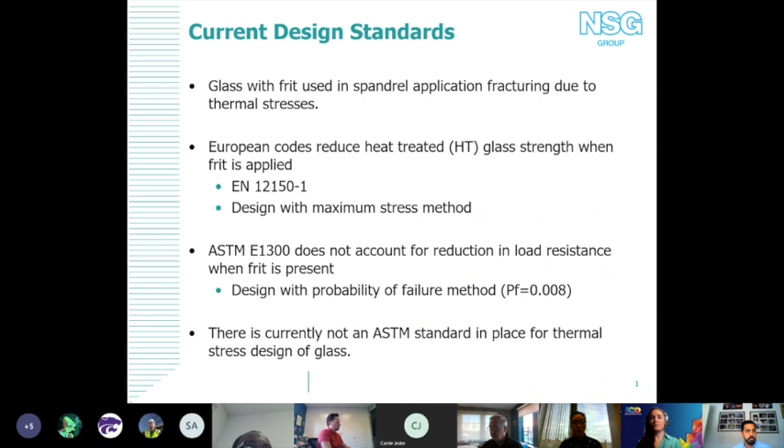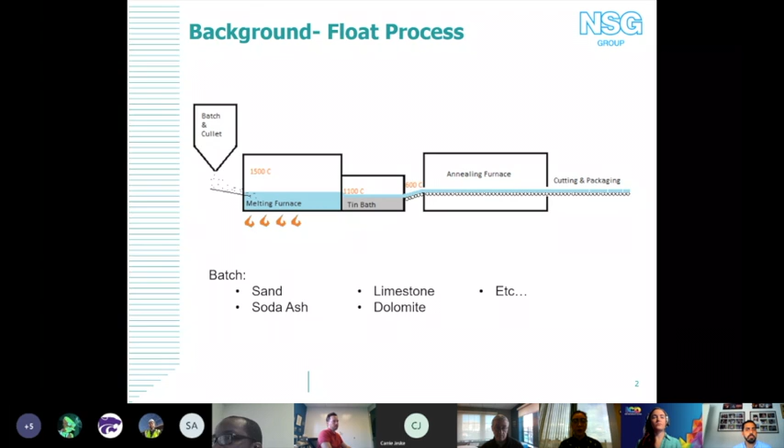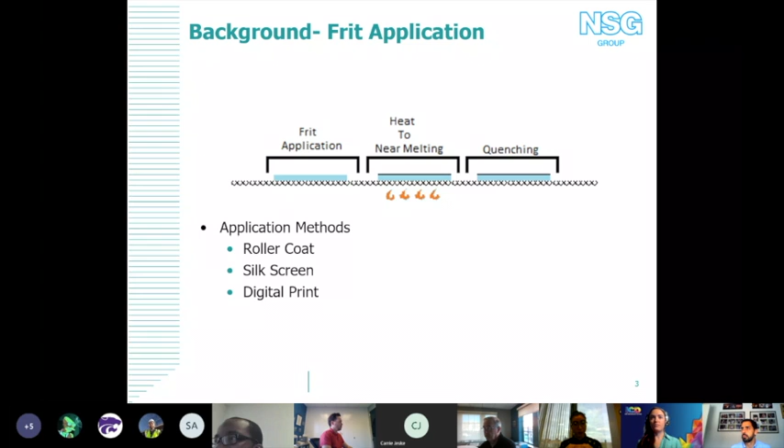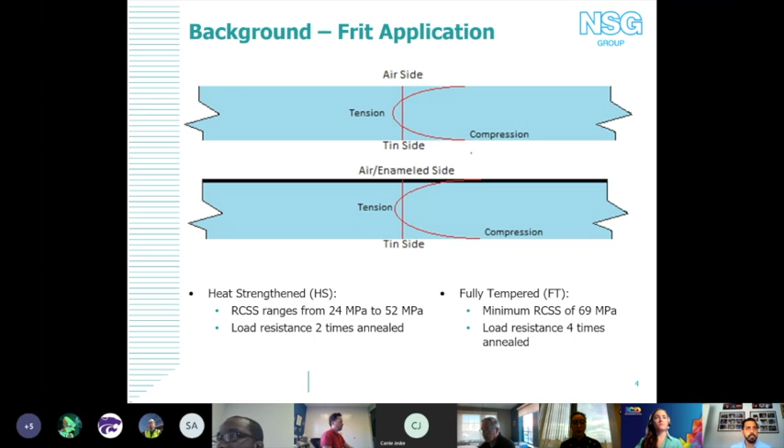So when you design heat strengthened glass, it theoretically has a load resistance of 2 times annealed glass, and fully tempered should have a load resistance of 4 times annealed glass. So this is just a general background on where we're starting. If you move forward, Kate.

So what I've done is I've broken out 2 phases of what my research was to give an idea of what this load resistance reduction looks like. Initially we did some small sample 4-point bend tests, and we use this just as an observation of: does ceramic frit impact load resistance? Does it matter which surface it's on? How much? Kind of just as a gauge of whether there's an actual change in mechanical failure whenever you apply ceramic frit.

Then the second test was our uniform pressure test, more what you would see in terms of a 4-side simply supported piece of glass. In this, we went through and checked varying percentage coverage, and we're able to see where the location of failure was with regard to the frit coverage on the glass. So we'll go over both of those.

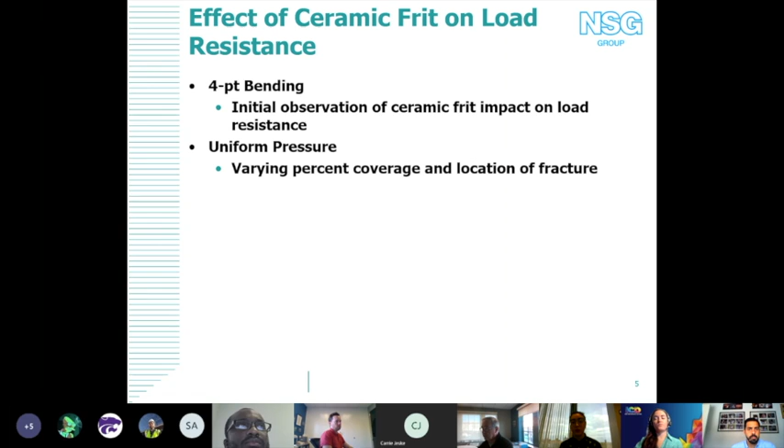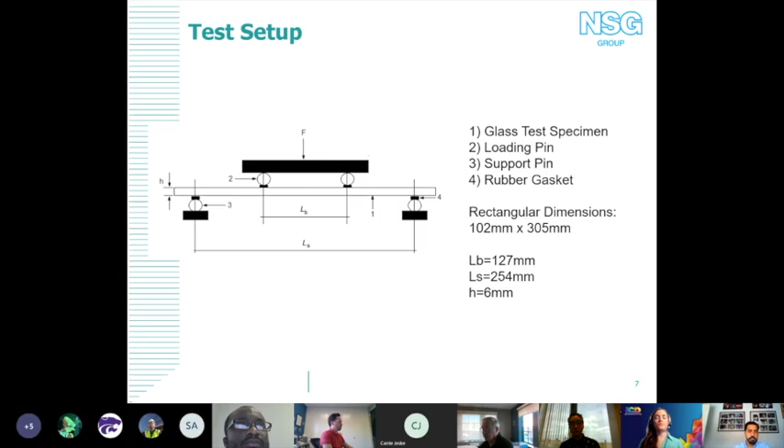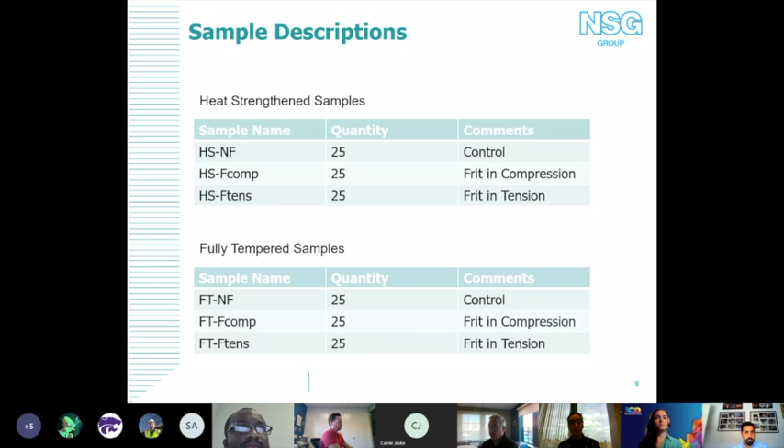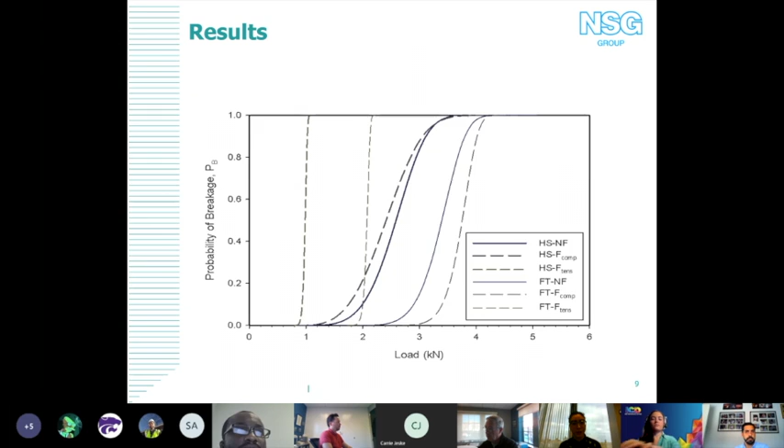So if we move forward, you'll see we focus down at a probability of failure of 8 in 1,000. It's a lot closer here, but we're still seeing a 40% decrease in heat strengthened glass and a 20% decrease in fully tempered glass once you start putting that fritted side in tension.

Some of the tests we did showed that the glass was fracturing at a stress lower than the recorded residual stress that we measured, which means potentially the residual compressive stress on the fritted side isn't as high as it would be on the unfritted side.

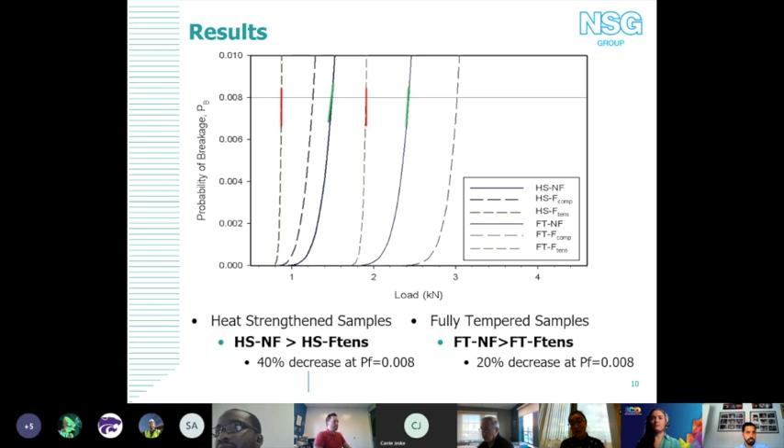This is just a quick layout of what those percent reductions look like. We can move forward.

When we realized the glass was fracturing at stresses lower than the measured residual compressive surface stress, we used a wet etch process to remove the frit and try to measure what those residual compressive surface stresses were, and we found them to be significantly lower than what is actually defined as heat strengthened or fully tempered by ASTM.

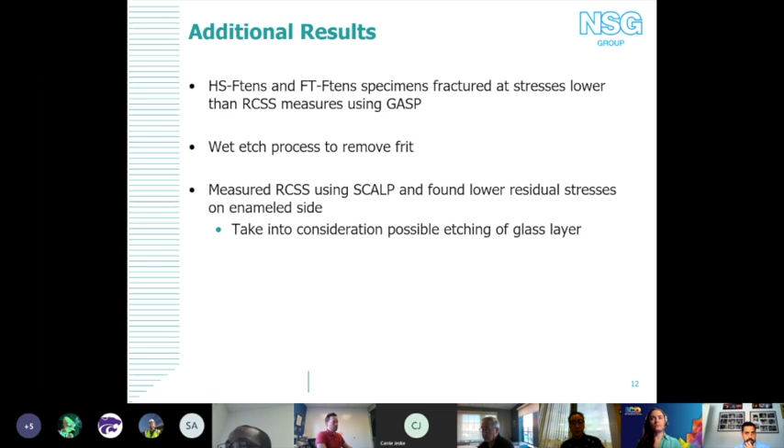So now I'm going to move forward to our uniform pressure test. These are four-side simply supported tests. Essentially we had these large scale tests, put them in a frame, and used a vacuum to create a uniform pressure on the surface of the glass. In this case, we were testing everything with the frit in tension, because we knew that was essentially where the issue was.

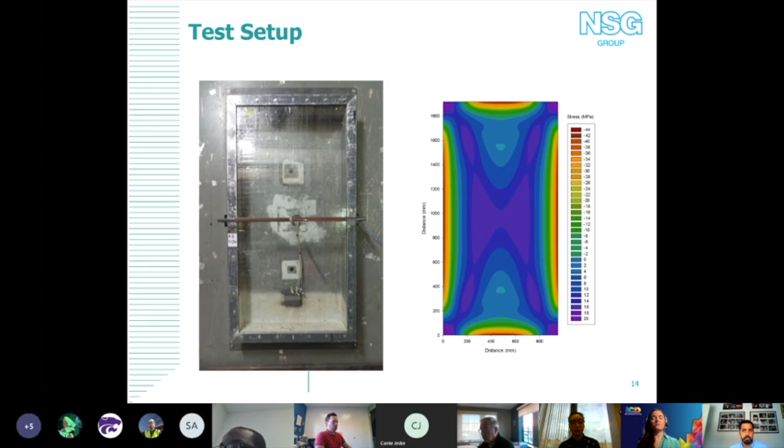What we did was test our control, and then we had varying percent coverages with this frit, and it was all a gray frit. So we did 40, 50, 60% coverage, and then full coverage.

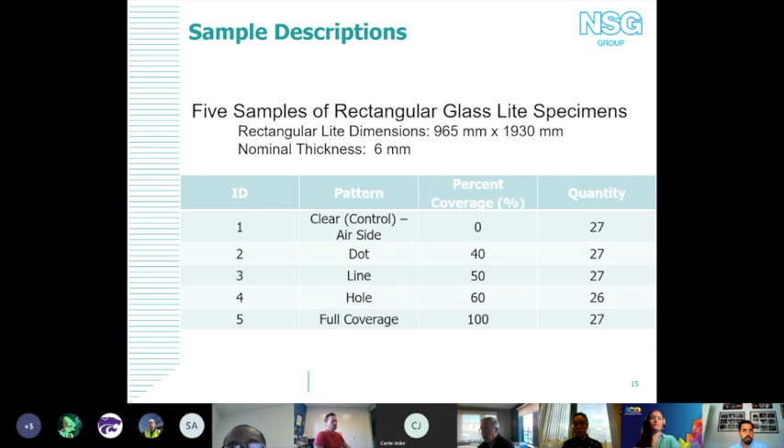Once we applied the frit onto the glass, all of those samples had frit on them, and the coefficient of variation significantly reduced. So we know it's probably the same reason for mechanical failure that we're seeing in our previous tests. Again, at the mean level, there's not really a clear correlation with regard to percent coverage — it wasn't like 40% reduced it this amount, 50% a little more, 60% a little more. There was no clear answer or solution to show how that worked. But what we saw was significant load resistance reduction in general.

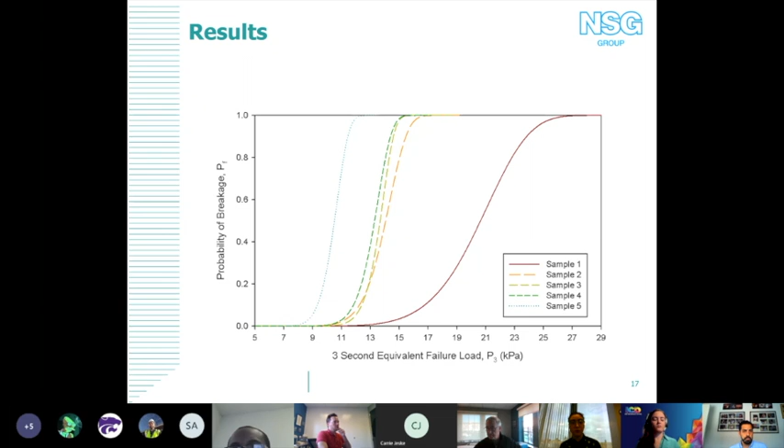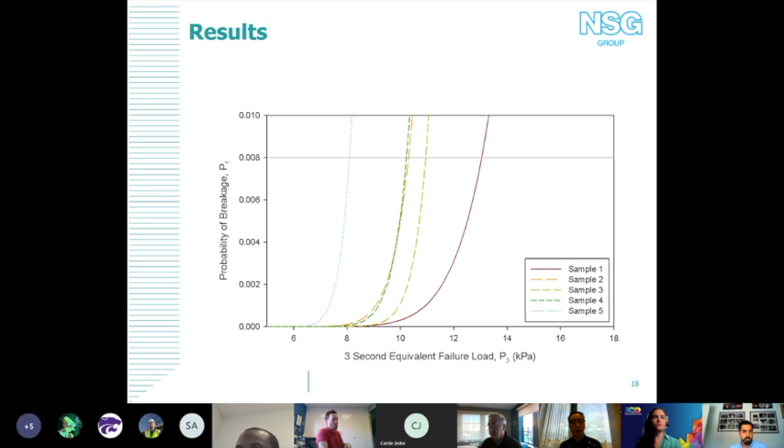Next slide — here's the probability of failure of 8 in 1,000, showing what that looks like with regard to E1300 design. What we saw was essentially a load resistance reduction ranging anywhere from 16 to 38%.

Interesting to note that samples 2 and 4 were fairly close in their percent reduction, and their patterns were exactly the inverse of each other. So it may have something to do with the layout of the pattern versus the stripes, which followed a different layout. I don't have a definite answer for that, but essentially what we're seeing is still a fairly significant reduction.

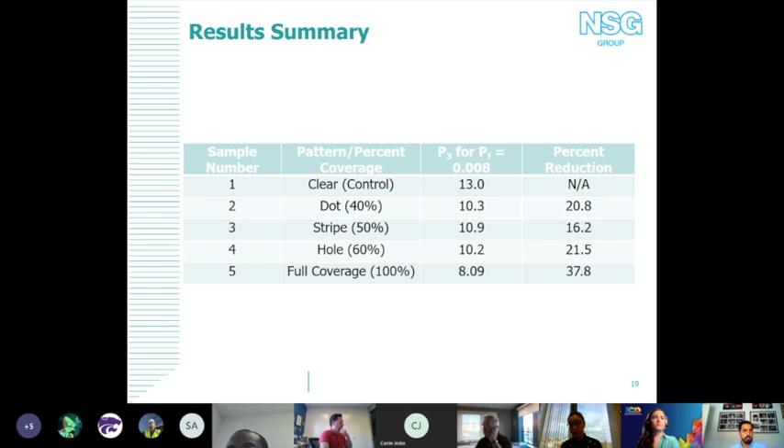So what does that mean? When designing, the last thing any of us as engineers want is to make an uninformed decision on this. A lot of firms are going through, and until E1300 adopts something, are either using some sort of percent reduction, or just automatically fully tempering anything that has frit on it, so they at least get heat strength and load resistance.

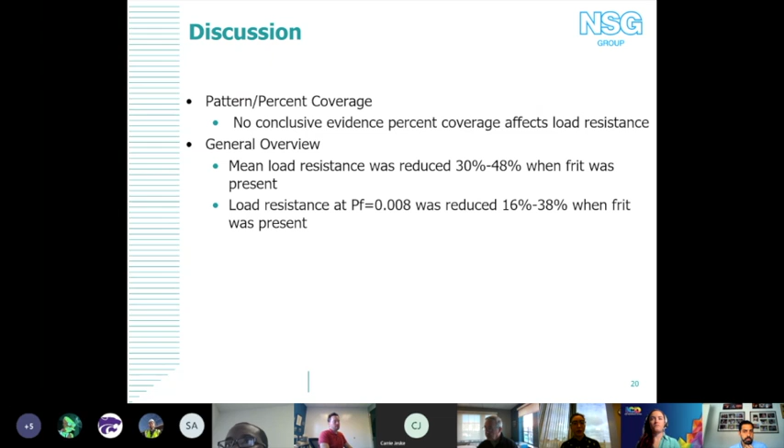But the next slide has a little more design implications on it. Oh, I forgot about this.

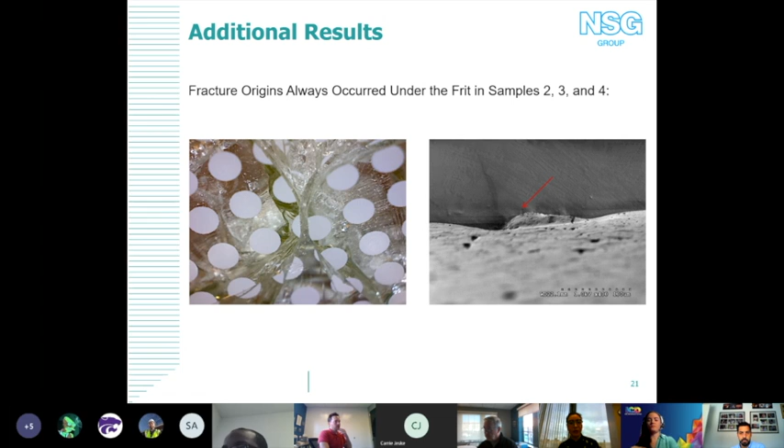In the next slide there's another picture that's a little clearer. In this right picture, you can very clearly see where the frit is and where the fracture occurred. It's always directly underneath an area where there was frit.

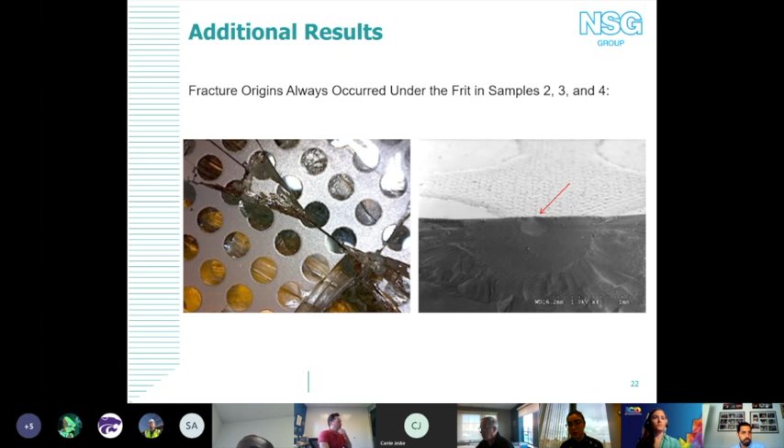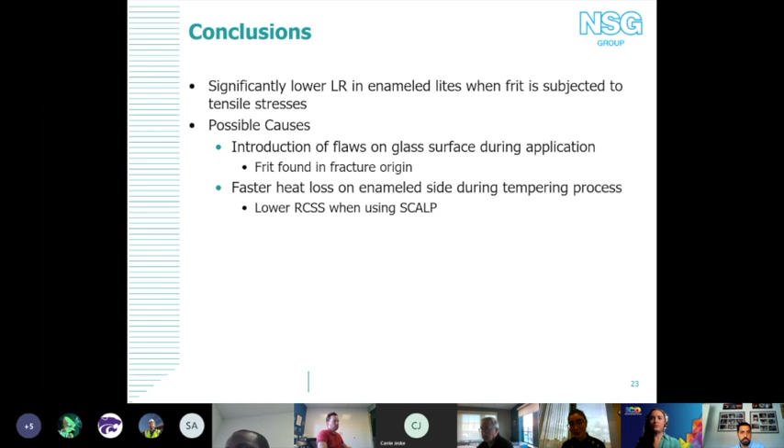So really, some of the possible causes: there may potentially be flaws on the glass surface during application, which is why we're finding frit in the fracture origins. Another possibility is more heat loss on the enamel side during tempering. Potentially by adjusting the tempering process, you could create a higher or more even residual compressive surface stress, but more work needs to be done to see if that's even plausible.

Where this impacts design, and leads into discussions from your podcast previously, is that a lot of the breaks are happening due to thermal stress. So what impacts thermal stress resistance? One recommendation someone made was, okay, I'll just design with a thicker lite. If you're getting this load reduction, you could design with thicker glass for more strength. But whenever you're designing to resist thermal stress, increasing the thickness of the glass doesn't actually improve that resistance.

What really increases thermal stress resistance is the residual compressive surface stress from the tempering process. So if you're designing with frit and have something at heat-strengthened spec, you probably want to move forward and just make that a fully tempered lite.

Impact when designing for wind load: adding a percent reduction doesn't necessarily mean you'll increase the thickness of the glass. A lot of times you could add a 20-30% strength reduction and it won't change what thickness you select, because most of the time when designing for wind load, glass selection tends to be governed by deflection, not load resistance. So most of the time you won't even see a change with regard to wind load resistance.

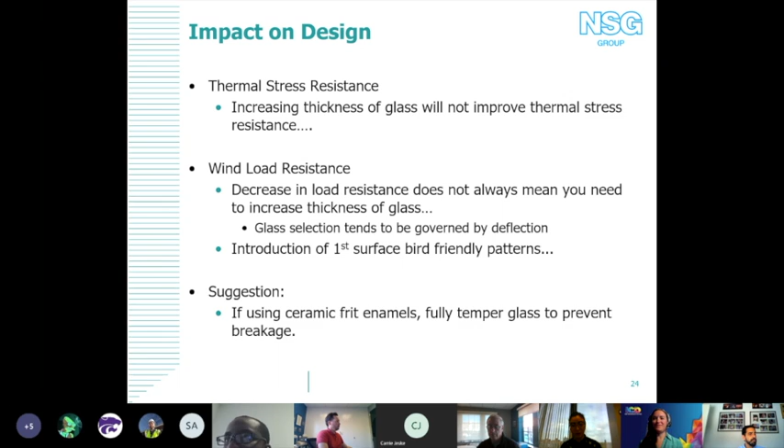Thanks, Kayla. I will present about a coating option that does not weaken glass, and then we can get to a discussion and Q&A over everything presented today.

Thanks, Kayla, for sharing your expertise and research on ceramic frit's weakening effect on glass. My company, ICD, participated in a white paper released about 5 years ago, alongside Texas Tech University, Chris Perry, glass consultant, Dow, and facade engineering firm Morrison Hershfield, to determine whether silicone coatings, an alternative to frit applied after the heat treatment of glass, also have the same weakening effect.

I'll be showing you the 4-point bending test results of silicone, as well as ball drop testing, which isn't related to thermal stress but gives a hard number on the impact resistance of glass.

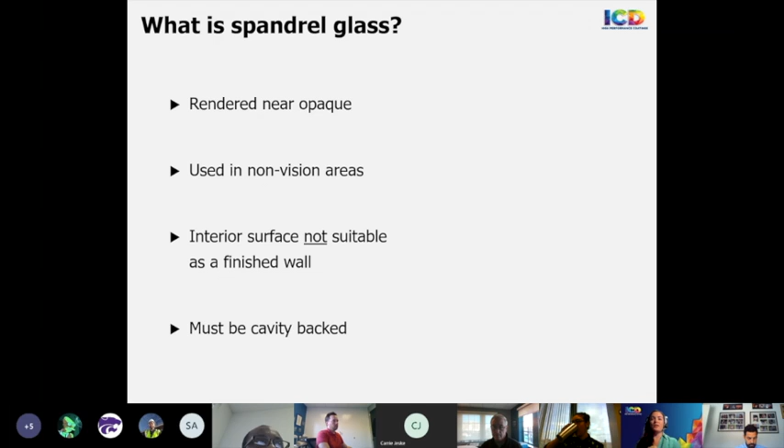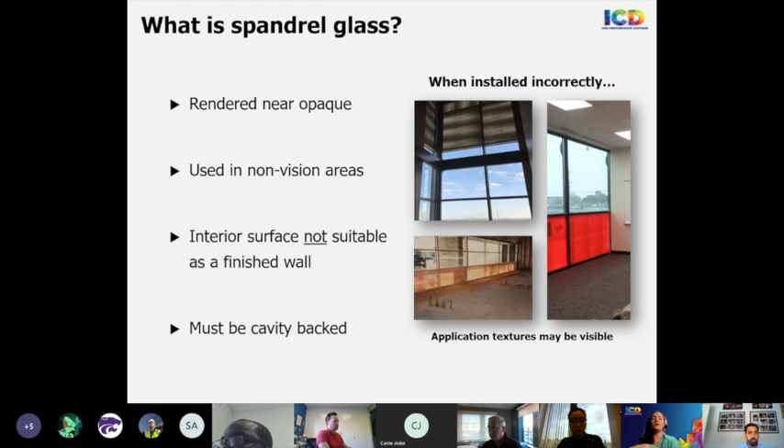Once installed correctly, it will appear 100% opaque. It can be used for its functionality, commonly designed to conceal structural and mechanical elements from exterior view, such as floor slabs, vents, electrical wiring, and mechanical systems.

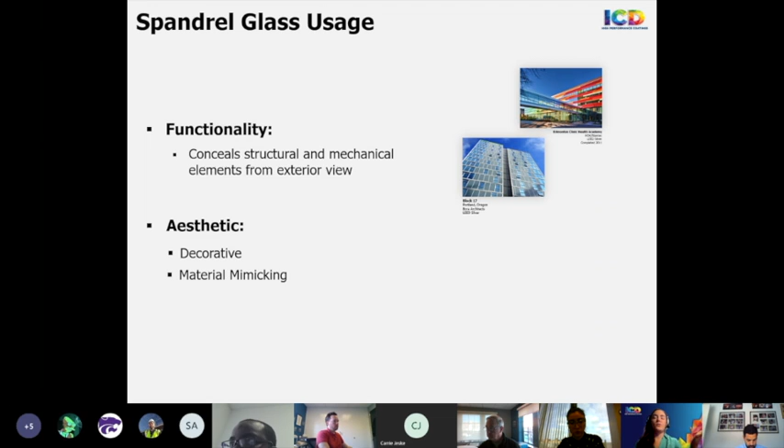From a design perspective, it can be used for aesthetics, decorative applications with bright, fun colors, or material mimicking—sometimes architects send physical samples, for example of the framing used around the glazing, so the spandrel glass can match that. It can also be used for retrofit or re-skin applications, or to create contrast on the facade.

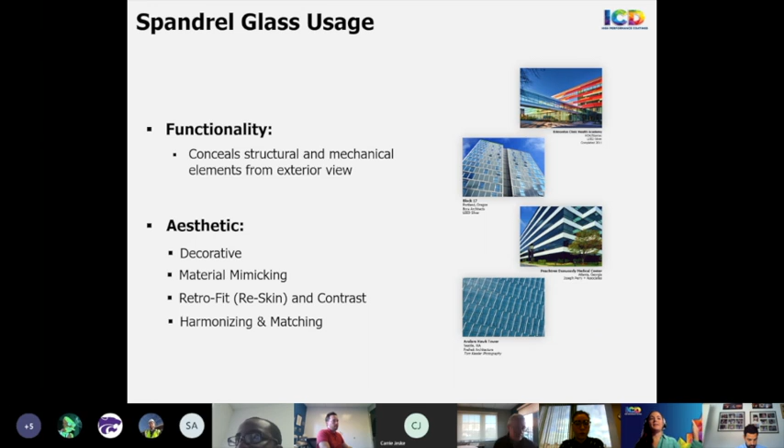Or harmonizing, one of the more common design goals, where you want the entire facade to have that nice seamless blended look, which spandrel glass can achieve as well.

Now I'll show some examples of how thermal stress breakage occurs in spandrel glass applications. Thermal stress occurs because of solar gain. Even though reflective and low-E coatings are sometimes used for the spandrel cavity for visual continuity, solar heat energy can still get through between the glass and the spandrel insulation, heating that cavity up.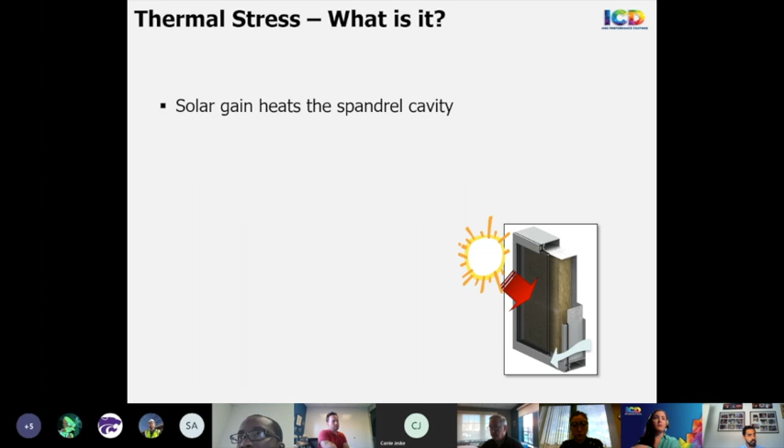Then the center of glass heat loss is somewhat restricted. If you have a reflective or low-E coating, along with the composition of an insulated glass unit, it reduces heat loss to the exterior. The insulation, or cavity backing behind the spandrel glass, reduces the possibility of heat loss to the interior. So that cavity gets very hot.

The solar gain, coupled with the restricted heat loss, allows the center of glass portion of the spandrel glazing to become very warm. At the same time, the surrounding framework chills the perimeter of the glazing, so the warmer center expands relative to the colder perimeter, creating tensile stress. When that stress exceeds the strength of the glass, breakage can occur.

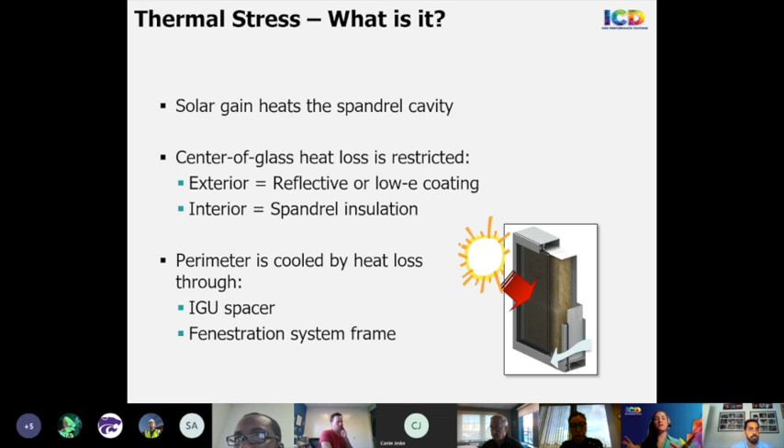Here is a visual of the center of glass area, which gets hot from solar gain, surrounded by a perimeter area that is cooled by heat loss through the framing, which can result in a crack forming.

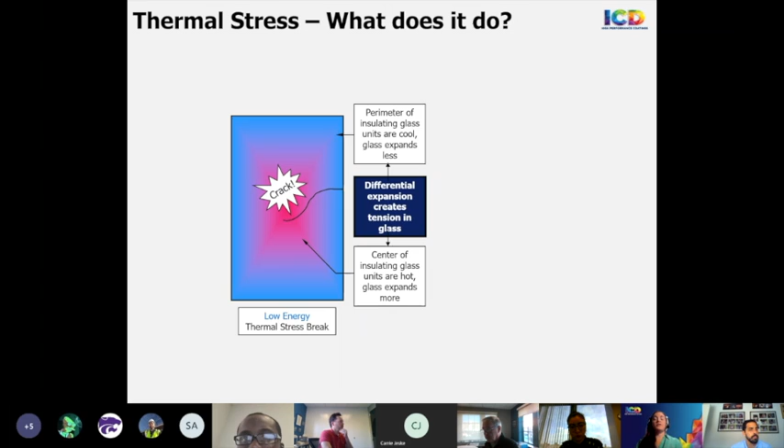Annealed glass, which has not been through the heat treatment process, takes a temperature differential of about 91 degrees Fahrenheit to induce enough tensile stress to cause breakage. When you see a single crack like here on the left, the temperature is likely within that range. But when the cracks begin to branch out like this, it tells us the temperature difference might be much higher, with more stress in the glass, with heat-treated glass.

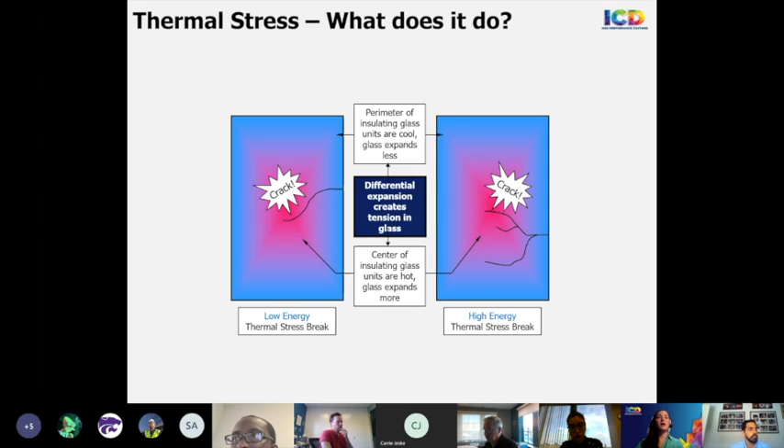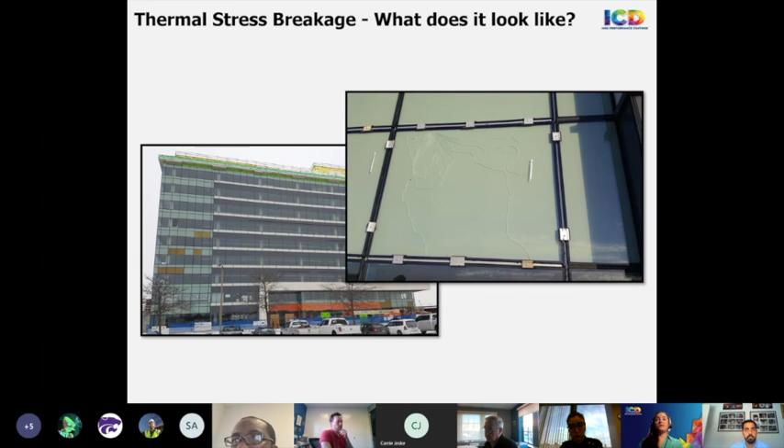Here's a real life example of a building with glass broken due to thermal stress. There was an insulated glass unit heat treated for the spandrel with a low solar gain, low-E coating on surface number 2, and an insulated sheet metal backpan behind the glazing unit. The inboard pane of glass is cracked, with a ceramic frit opacifier applied to surface number 4.

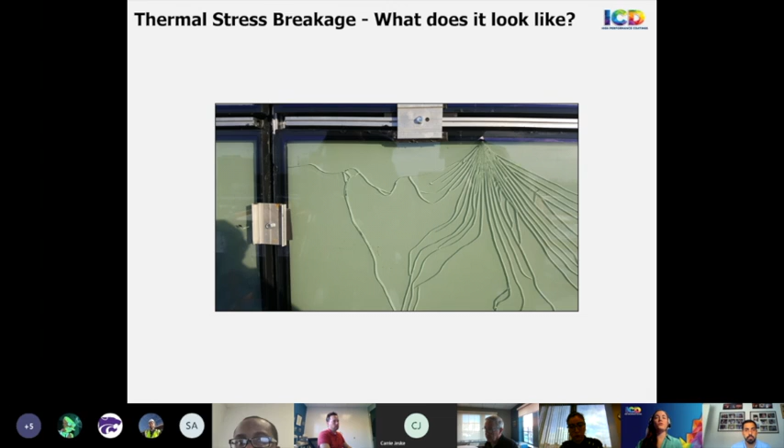Looking closer, we can see the top of that crack and how it branches out at the spacer, with temporary support installed to hold the glass in place. Zooming in, you can see the fan, and the branching of the crack actually starts above the spacer—not right at the edge, but within the depth of the spacer and perimeter sealants.

So taking that unit out and flipping it around, now we are looking at surface number 4, which is referring to the interior facing surface with an applied ceramic frit.

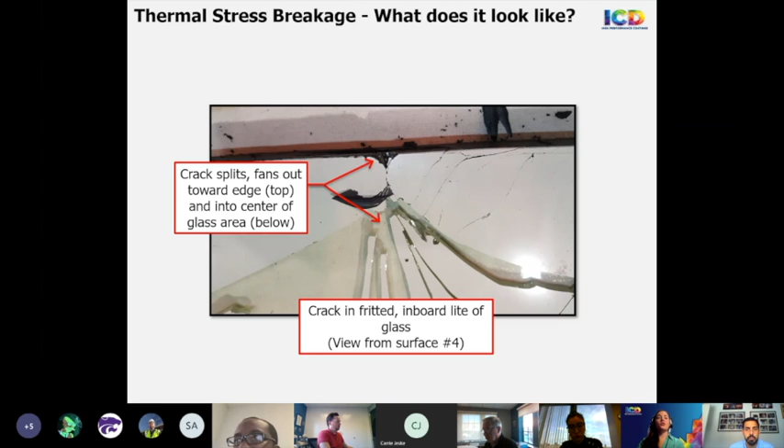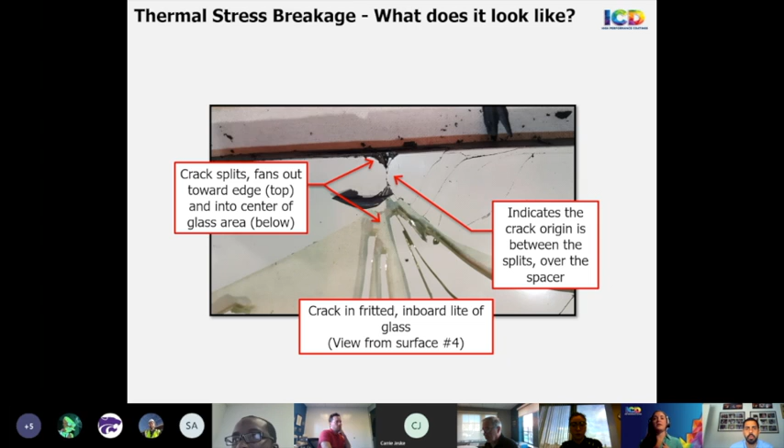The crack is on top and moves downward toward where it fans out to the center of the glass area, and the crack progresses toward the edge of the glass, fanning outward in that direction as well. This tells us that the crack origin is somewhere in this region between the two fans, which is significant because cracks in annealed glass typically begin right at the edge of the glass. In this case, the crack is clearly beginning inward, away from the edge.

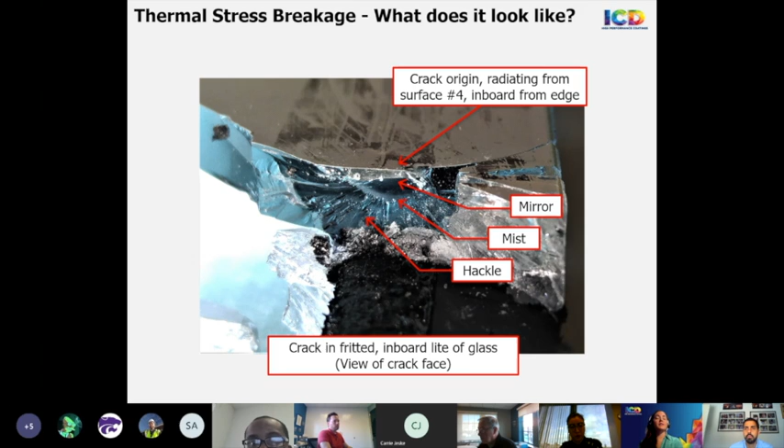First, there's a semicircular shape referred to as the mirror. Outside of the mirror, there's a fine pebbled area known as mist, and following that's a jagged radiating pattern known as hackle. Collectively, this tells us that the crack began up at the top on surface 4, where the frit is applied, and radiated downward to the left and to the right.

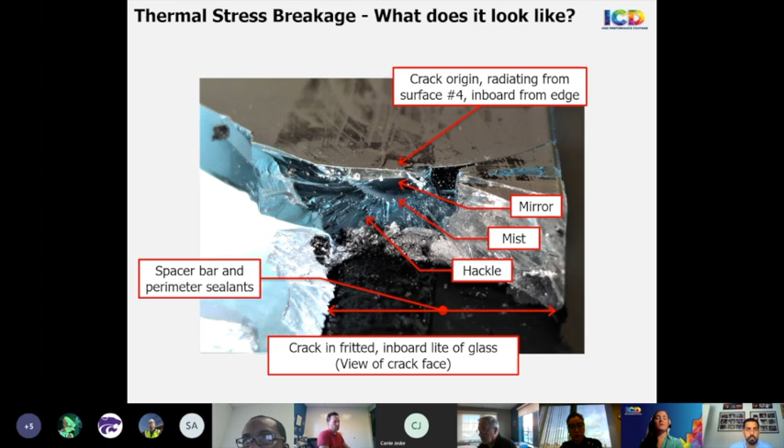And at the bottom, we see a wide black band. This is the perimeter sealant and spacer, showing that the geometric center of the mirror is within the depth of the spacer, not at the edge, but inboard from the edge.

So naturally, one of the questions that arises when discussing thermal stress is how can I find solutions to prevent breakage occurrence. A common question that arises is, can ventilation be used to remove heat from the spandrel cavity?

With rain screen wall design for brick, the cavity is typically drained from behind the brick to the exterior to remove moisture that may penetrate. Vent holes are included at the top of the brick panels to provide opportunity for air to flow through the cavity and help dry out that moisture.

So the first approach is to fully seal the perimeter of the glass, typically occurring in a 4-sided structurally glazed application. The second condition has only drain openings at the bottom, which is the traditional approach for draining spandrel. All spandrel glass applications should have some sort of water mitigation system in place to eliminate moisture buildup.

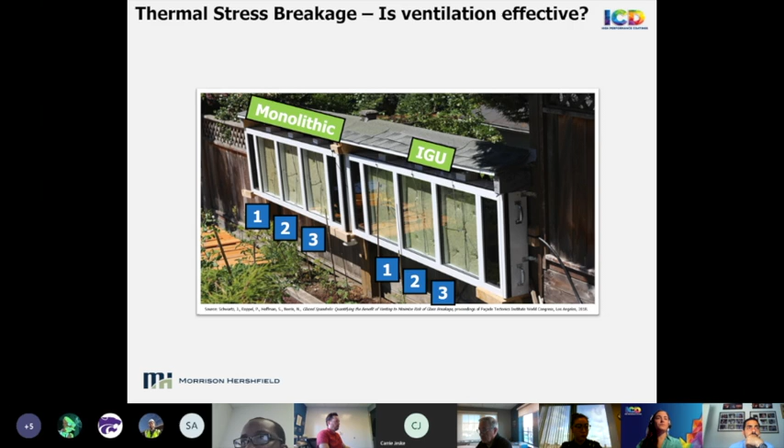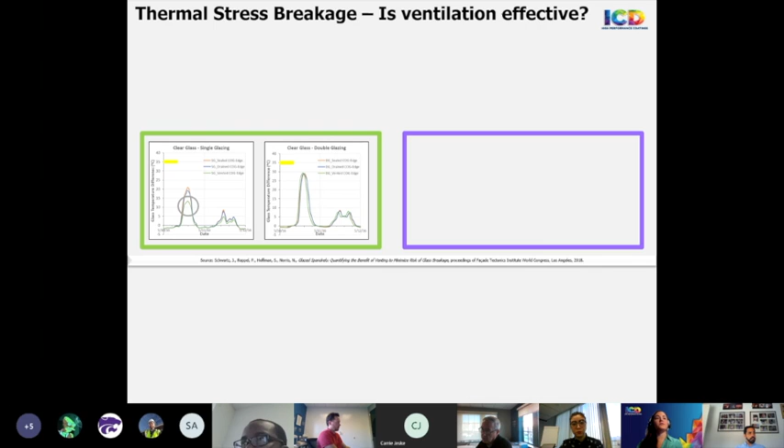So spandrel ventilation does make a difference. And with insulated units, there's not much of a difference between the three options, and we're just starting to reach the level of danger of thermal stress breakage.

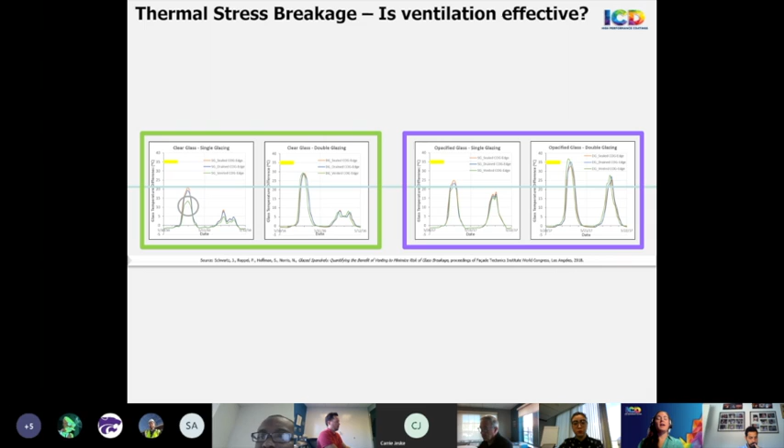Now comparing against the opacified results, looking at the condition for monolithic, the temperatures increase but are still below that 35-degree critical range. But for IGU, you can see they now start to reach out of that range. So there's a risk that can be dealt with by heat strengthening the glass, but adding a ceramic frit can take away some of that benefit, as we saw in Kayla's presentation. I'll be showing a coating alternative in the next few slides.